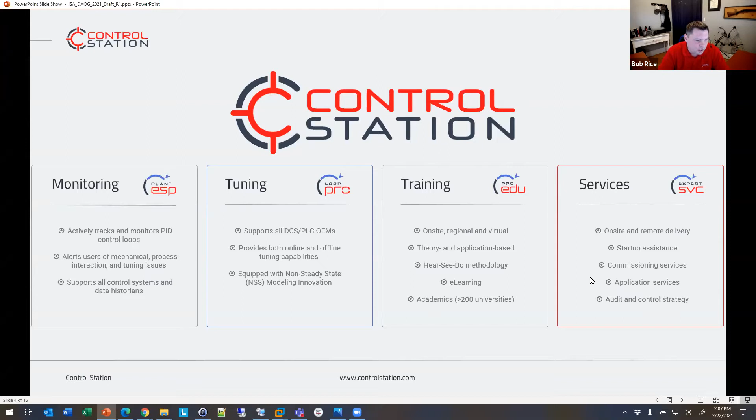Additionally, we have divisions of our company focused on training and services. In fact, we still support a little over 200 universities with curriculum, software, and simulations to teach process control, so those next generations of engineers come out with a bit more practical experience on the process control and automation side, as well as services for audits, application startups, optimization, and consulting.

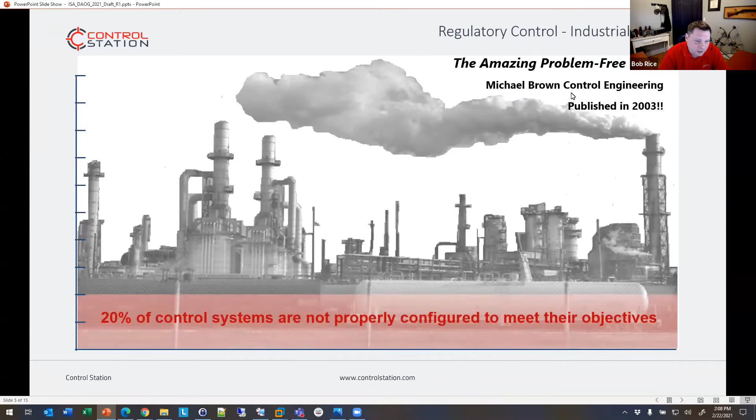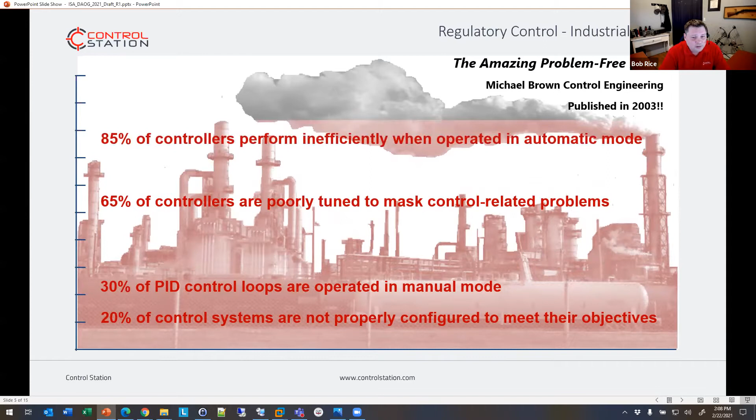So there is this really well-quoted paper published in 2003. If you've ever been to any talk on PID tuning and monitoring over the last 20 years, these are the statistics that are quoted, right? Something along the lines of 30% of control loops that are commissioned are still operating in manual mode. They're not in automatic, they're not in cascade.

For whatever reasons, whether it be mechanical or tuning or just operator behavior, these assets are run in manual, which requires operator intervention and operator control. They're the ones adjusting the valves and the pumps to do the control, versus letting the PID blocks do it.

Then there's a whole wealth of other issues where controllers are so poorly tuned they mask other issues. I don't know how many valves I've done flow and level control tuning on where the controller was tuned to the point where it's trying to hide valve behaviors, valve stiction, and so forth. You can't really fix that type of behavior with tuning. You just tend to hide it and mask it and often make problems worse.

And then you have a fair bit of controllers that are actually causing more variability in automatic than in manual, where the controller's tuned unstable. So there's a lot of opportunity. But these statistics, let's be honest, are 17, 18 years old now, right?

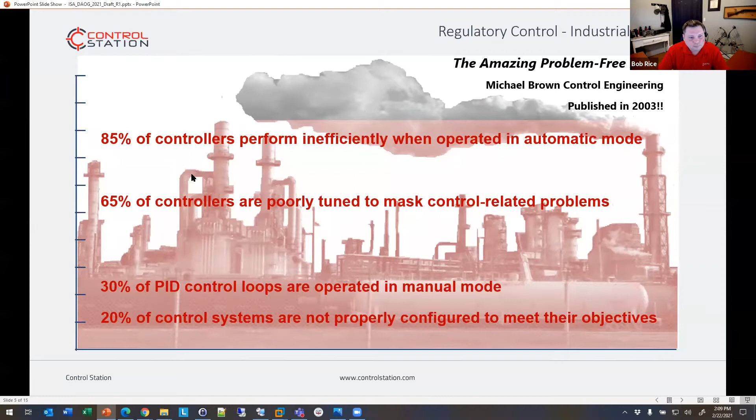We had to have gotten better over time. Well, good news, bad news, right? We've gotten a little bit better. So PlantESP has been deployed, as I had mentioned, in 67 different countries around the world. This is an extract of that data. This is from a little over 150 different plants in a variety of different areas, a little more heavy on the oil and gas side.

And what we can see is we've made a little bit of progress, right? We can say, look, we're running about 80% of the controllers in the correct mode versus 70. Well, we've gotten 10% in 18 years. I would have figured we'd done a whole lot better than that, but we're still trying to get to that point, because a lot of times, again, data's being captured, being stored, nobody's doing anything with it, right? There's not the monitoring in place.

You know, data rich, information poor, right? We heard that a little bit earlier. We've got a lot of data, not a lot of information. So to be able to take that out and do something with it, go out and identify the opportunities, get all of our controllers running in the correct mode.

We have a lot of controllers now that are oscillating, right? About half the loops that we've surveyed don't have any measurable oscillation in it, right? The other half have measurable oscillation. Now, 44% would be slight. What does slight mean? It's based off the total variability of the signal and how dominant the frequency is, but it's a slight oscillation, right? It would be one that's maybe not completely noticeable to operations, but it's still there.

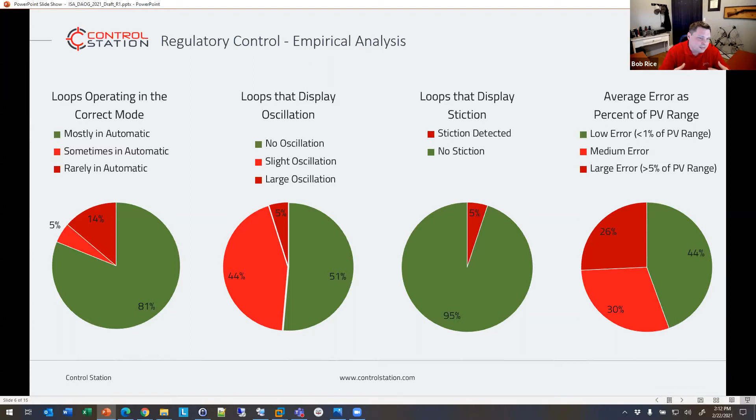So what does this tell us? It tells us the opportunity is still there, right? Well, of course the opportunity is still there. We're still in this area. We know the opportunities are there, right? And now we've got data. Now we've got systems out there that can get us this information in a much easier fashion.

So PID tuning, PID control tends to be the thing that gets left for last, right? Everyone comes in, loops get commissioned, they get started up, and they're running, and everyone just walks away. Like, it's working, it's good enough, right? So what happens when things go wrong? How do you identify that? Well, most of the identification is reactive. Operations team says it's broken, go fix it, right? By that point, all the damage has been done.

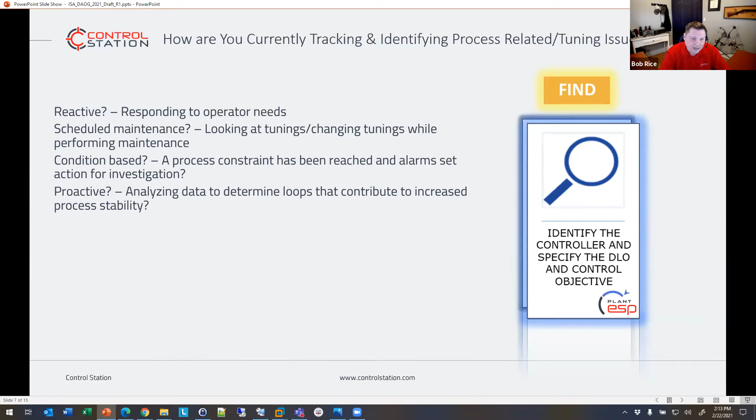We need to get into a position where we are much more proactive in being able to identify the opportunities before the operations team notice and it impacts production. So we need to get beyond reactive and be much more proactive to be able to predict these types of scenarios. And so PlantESP is a tool designed specifically for monitoring all of your data sources to be able to

identify controller opportunities. And we're going to go through the different KPIs and metrics and different tools that are within it. But from an architectural standpoint, what makes PlantESP unique is it can sit on top of a data historian layer. So the information is available to get extracted from the data, right?

You already have the data. Let's turn that into information, right? So we can leverage all the data in the system. What makes that unique is now we can backfill calculations. We can take advantage of the months or years or weeks of data that you've already historized. We can go back and actually crunch the numbers to come forward with it.

We've also built an entire calculation engine, visualization engine, and system administration tool that puts this whole package together. And you can consume this in a number of different ways. We have an entire web UI that I'll go through a few examples of, but we also have direct email alerts, reports that can be sent through email. And more importantly, we have an entire data schema on the back end that can be consumed by other tools.

We're getting to the point where if you have a silo of data that cannot be accessed by other tools, that is a worthless silo of data, right? You need to be able to take this information and let it be consumed by other tools that build additional intelligence above it, right? Whether it's looking at predictive analytics or artificial intelligence type modeling on top of other numbers, right?

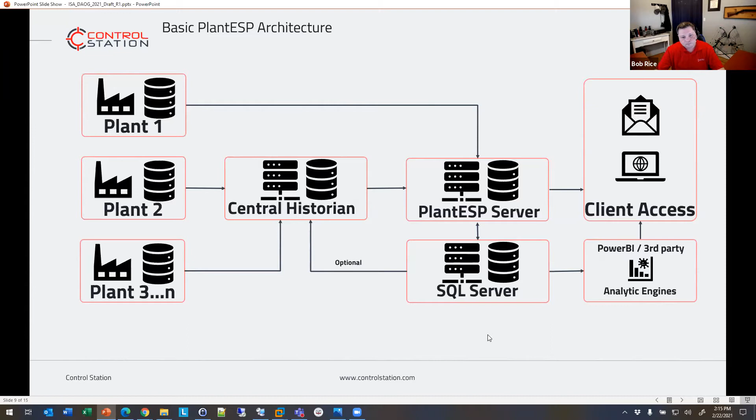So PlantESP, again, is a web dashboard. It's designed to take all of the controller data and compute KPIs and analytics associated with it. So we're going to be able to calculate performance and metrics that tell you how your controllers are doing, how your plant is doing, how your enterprise is doing as a whole, being able to identify changes and troublemakers within your facility. So you're not waiting for your operations team to come in and say, hey, this controller is broken. Here's what you need to do to go fix it.

We're going to say, look, here's a loop that's actually been changing and drifting in the downward projection. These are what the troublemakers here on the left are. You can click on the top one and immediately start to see, here's a loop that's actually dropped in performance, right? Not that it's poor, but it's changing and it's moving in the wrong direction. So it's very, very quick.

The web UI is all HTML5. It can be accessed with any modern browser. You can access and control user access through Active Directory. So user permissions and credentials can all be automatically assigned. And again, the tool leverages existing data historians to be able to use that historical data.

It also provides a very strong system for outages. If the PlantESP server goes out because your entire data center lost power, right? When it comes back online, it'll connect back up to the historian and resynchronize itself and fill in automatically all the missing data that's transpired. So even if you don't have constant access to the data, PlantESP can still do the calculations and metrics.

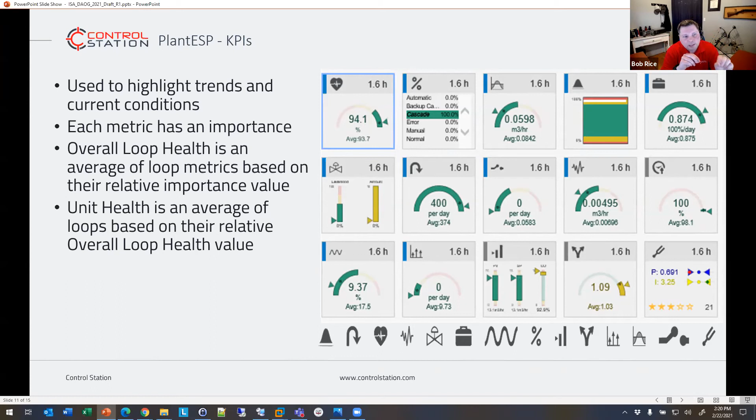There's a number of different ways to visualize the data, right? KPIs themselves, just numbers, are hard to understand, right? They're just numbers. What does it mean, right? And so there's a lot of different tools to visualize the data and what's happening. We've tried to create gauges and a UI experience that's very easy. It's very intuitive. Tools are great, but if nobody uses the tools, they don't work.

And so we spent a lot of time to make sure that our user interface is very clean, very easy, and requires very little training to get into it, generate a report, find what you're looking for, and identify the issues. We've got recommendations, we've got alerts, and different ways of looking at the data, such as heat maps, where you can pull up an area of your plant and get your simplistic red, yellow, green indicators of here's opportunity, here's loops that are oscillating, here's loops that are in the wrong mode, in a very easy to use interface.

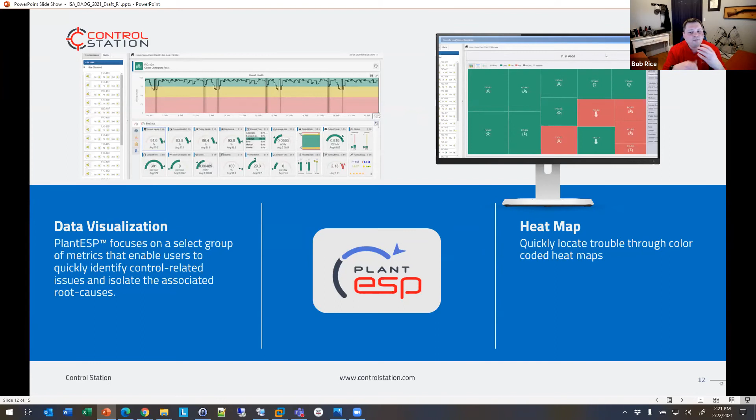So what is the benefit here? This was a fuel gas to oxidizer flow loop identified in Loop Pro. It was never a loop that the operations team said, hey, there's a problem with it, but it was one that immediately cropped up to the top of the list on commissioning of PlantESP.

It said there was a significant amount of output travel. The valve was moving around a lot, and it had a very erratic oscillation index, which meant it had very high oscillations and low and very high, but on average, it was oscillating a whole lot. So it was a really quick opportunity to say, hey, look, it's just a fuel gas, it's a flow loop.

They're pretty easy to tune. So we performed our tuning exercise on it. We went and were able to maintain tighter control. So we were tracking the average error. AAE is average error. We're 88% closer to set point with a 98% decrease in output travel and 88% decrease

in oscillation. If you're getting better control with moving the valve 98% less, you're going to significantly increase the life of that control valve, right? All of that is opportunity. And it was an opportunity that wouldn't have been discovered otherwise.

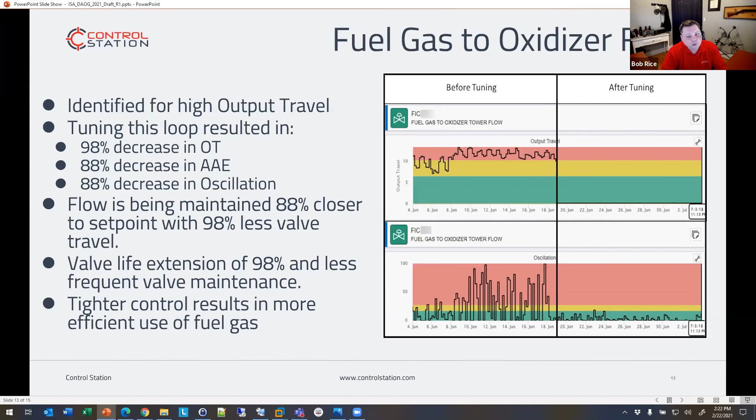But how do you actually start to go a little bit deeper into your plant? So there's some capabilities within PlantESP for doing interaction analysis between your loops, right? So the big questions are, when you have an issue in your plant, how do you troubleshoot it, right? Again, I mentioned you pull up all these traces and trends and you start looking at it. Well, now how do you determine where the root cause is?

Well, you add more traces to your trends, right? You start stacking all these trends up and you start looking at it and trying to line out the peaks and all of this stuff, where there are more advanced analytical tools that can help you along that path much more easily. So if we take a look at PlantESP, we have a tool called Power Spectrum Spectral Analysis, where we can take the process variables and we can actually run spectral analysis, look at the spectral density, be able to identify frequencies within the data.

We actually are able to check those loops that we want to do a deeper dive on, and then we can hop over to this correlation analysis, right? Correlation doesn't necessarily mean causation, but it's a good way of understanding the relationships between your loops. Once you start taking a subset of your plant down, you can start to look at it and you can identify these opportunities, and you can identify leading and lagging relationships between the controllers to help answer the question, where does the oscillation originate?